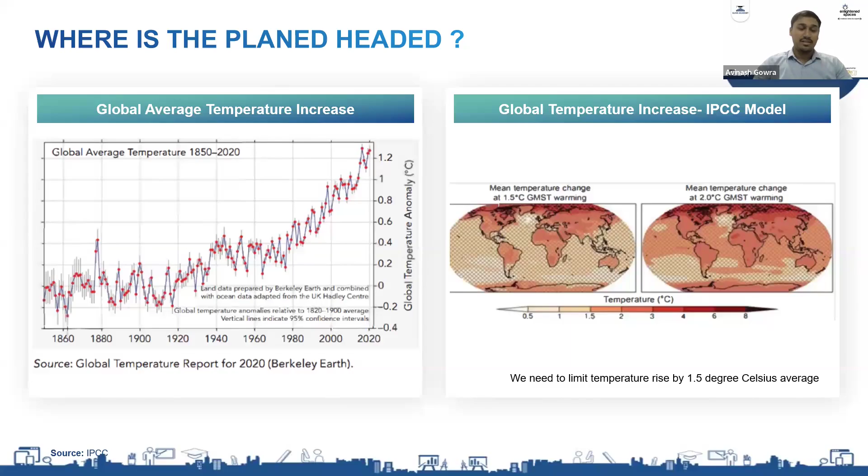And one of the main reasons attributed to these climate events is obviously the rise in global temperature. We have an agreement made in the Paris Climate Change Agreement, wherein all the leading countries have come forward and pledged to control the rise of temperature to not more than 2 degrees Celsius by 2100. If you look at the recent increase in surface temperature and the trend, we have already reached somewhere around 1.2 to 1.3 degrees Celsius. Looking at the rate at which the increase has been happening, we are nowhere close to meeting the target we have taken in the climate change agreement.

One of the key reasons for this increase in temperature is obviously the emission of greenhouse gases, specifically carbon dioxide. There are models which predict that if the current trend continues, there can even be an increase in temperature of up to 4 to 6 degrees Celsius by 2100, whereas what we are targeting is only up to 2. This calls for an immediate need for decarbonization of every activity that we are going to do, which is going to help the environment.

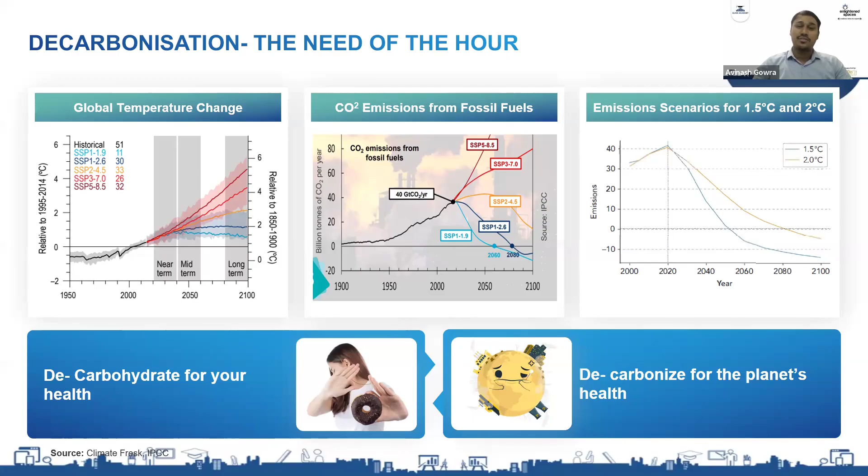In a very simple way, just like how we need to decarb or reduce carbs to take care of our health, it is also necessary for us to decarbonize for the planet's health.

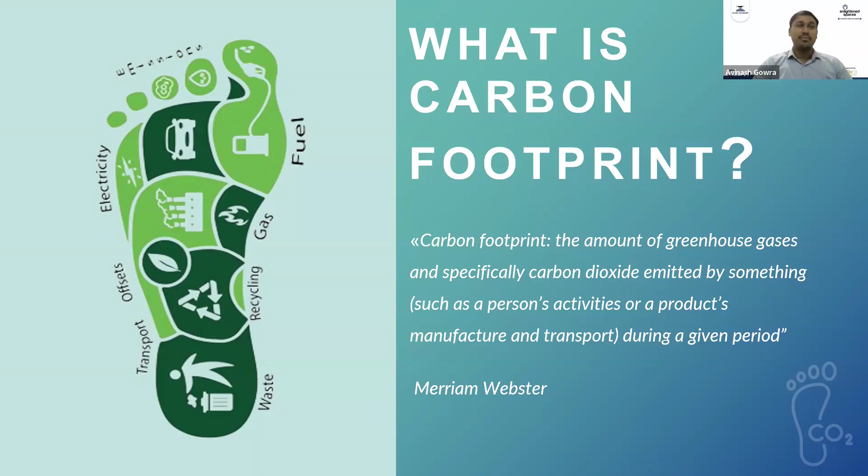So with this being said, let's try to understand what a carbon footprint is. Carbon footprint is basically the amount of greenhouse gases, specifically carbon dioxide, emitted by an activity. That activity can be production of a product, construction of a building, or transportation of goods from one point to another during any given period of time.

And why is it important for us in the building industry to be so much concerned about this?

If you look at the recent data, a survey says that out of overall greenhouse gas emissions happening, close to 39% of the global carbon emissions is coming from the building sector, which is an alarmingly high number.

An important fact to note is that 67% of India is still to be built. This means if we continue to build the same way, it is going to be highly unsustainable and not yield any good result for the environment.

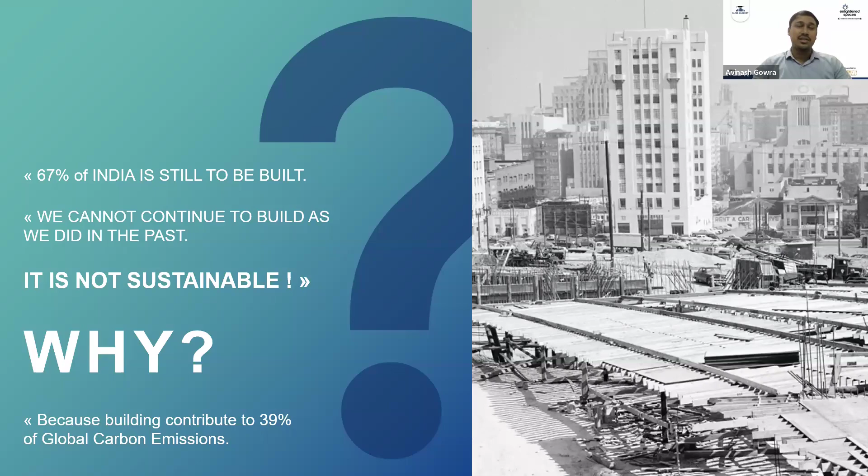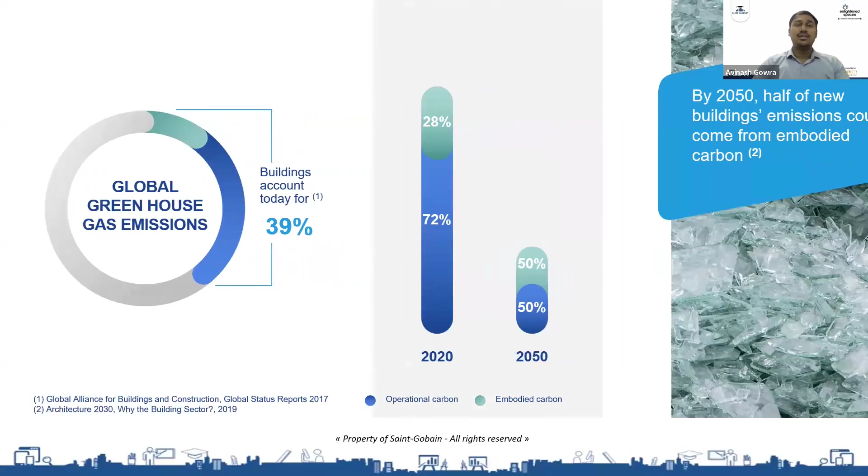With that established on why it is important to decarbonize, let's understand the two different types of carbon emissions. Of the 39% emissions contributed by the building sector, a recent survey says 72% is from operational carbon and 28% is from embodied carbon.

I'll explain operational and embodied carbon in the upcoming slides. With current practices, adoption of high performance materials, and current design practices, there has been significant work in reducing operational carbon. If this trend continues, the estimate says by 2050, of the overall carbon emissions, 50% will be from operational carbon and 50% will be from embodied carbon.

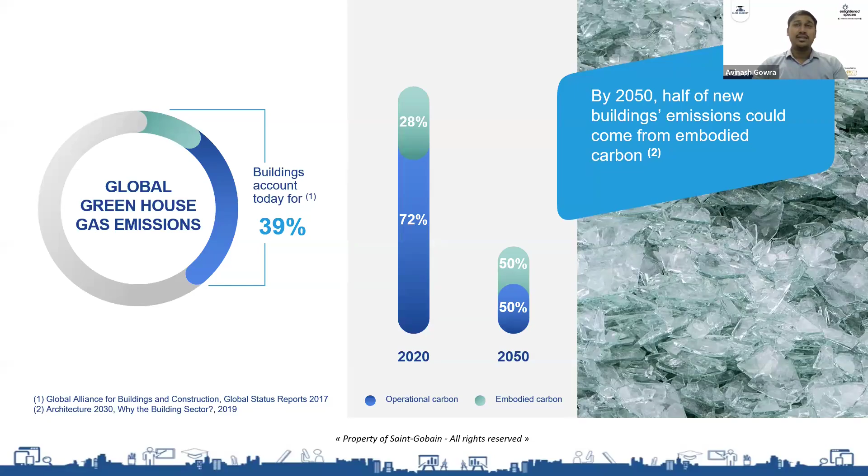This makes it very clear that it is important to reduce and work on both operational and embodied carbon. So what is operational carbon? Operational carbon refers to the carbon emissions produced during the operation and use of a building or infrastructure over its lifetime. For example, it can be carbon emissions happening because of air conditioning running during the day.

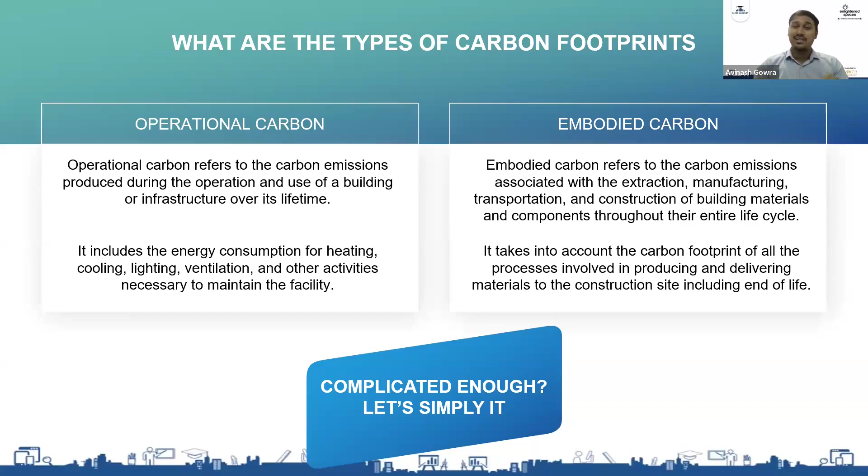It can be because of the water heater, or because of the lift being operated during the use of the building. In a simpler way, it includes energy consumption for heating, cooling, lighting, ventilation, and any other activity necessary to maintain the facility. All this is under the operational carbon of the building.

And what is embodied carbon? Embodied carbon refers to the carbon emissions associated with the extraction, manufacturing, transportation, and construction of building materials and components throughout their life cycle. This is right from the extraction of raw material to its installation and also its end of life, which is demolition and being dumped at the waste yard. All this contributes to the embodied carbon of the product or even of the building.

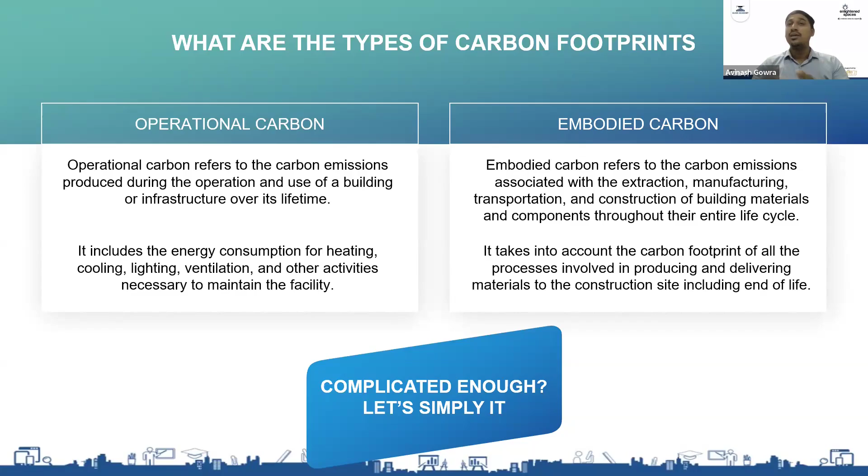If you still feel it's complicated, let me simplify it further. Embodied carbon is like a down payment on your loan, which is fixed. Once it's given, you can't change the down payment. Likewise, once you have constructed the building, the embodied carbon is fixed and you can't modify or change the embodied carbon of the building.

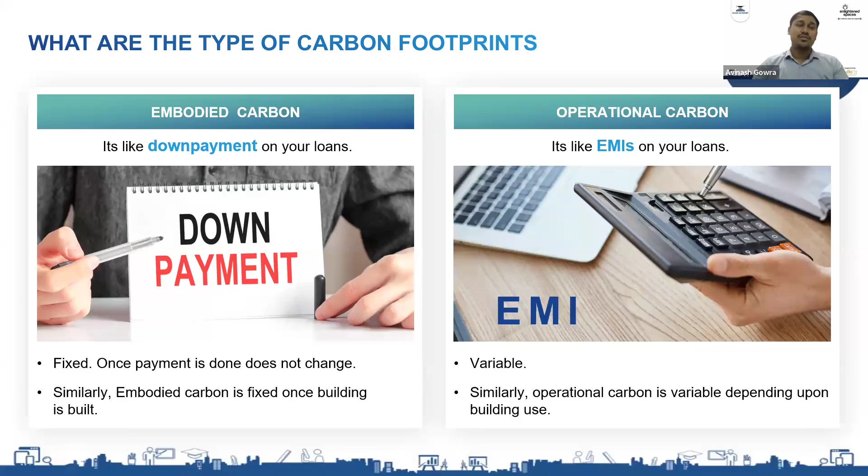Whereas operational carbon is like the EMI, which is variable. If I apply it to the operation of a building, it's like air conditioning. During summers you might have more emissions because of higher AC usage, whereas in winter there might be lesser consumption of air conditioning, hence lesser emissions. So this is a very straightforward example.

Now that we have seen why it is important to decarbonize, and understood the difference between embodied and operational carbon and how it exists in a building, let's try to link it and understand how these two play a role in making a building net zero carbon.

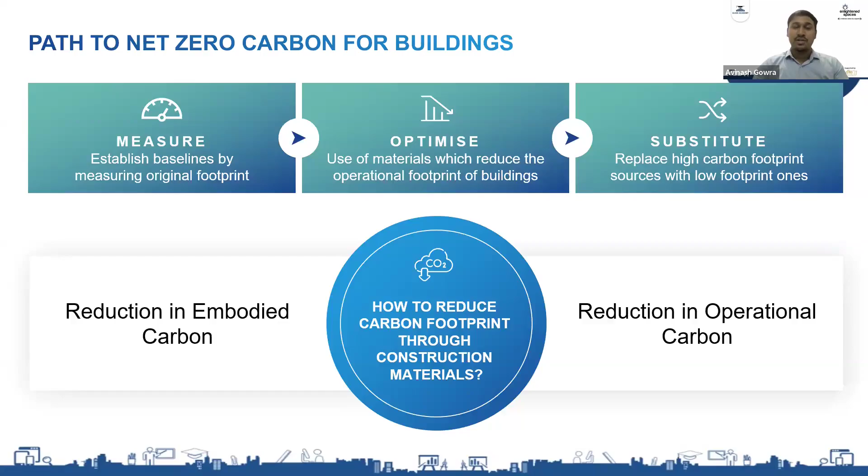I have proposed a simple framework: measure, optimize, and substitute. As we say, what can't be measured can't be reduced. Likewise, to even think about reducing or controlling the emissions of a product or a building, the first thing we have to do is measure how much we are emitting and what the carbon emissions of that building are.

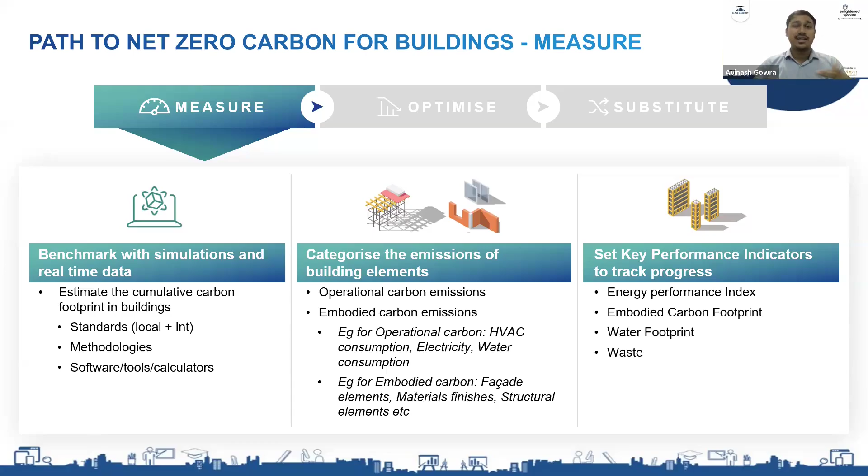There are multiple tools available with which we can estimate the emissions and benchmark them. Those emissions can be classified into different categories, like how much is from embodied and how much is from operational, and we can set key performance indicators so we can work towards reducing the emissions of those individual metrics and see how much we are able to reduce in the future. So this is with respect to measuring and setting the benchmark.

Next is optimizing. Once a building is up, we can try to optimize or even reduce the carbon emissions happening. Let's understand how glass can play a key role in optimizing operational carbon. If you look at a typical glass, there are three important performance parameters. First is solar factor.

Solar factor basically controls the amount of direct heat coming from outside of the building to the inside. The lower the solar factor, the more heat the glass will cut. We also have U value, which is the indirect heat that is coming from outside to inside. Again, like I mentioned for the solar factor, the lower the U value, the better the performance.

We also have another important performance parameter, which is light transmission, basically the amount of natural light the glass can allow from outside to inside. This is again in form of percentage. For example, a glass can have 50% light transmission, which means it will allow 50% of the outside light to the inside.

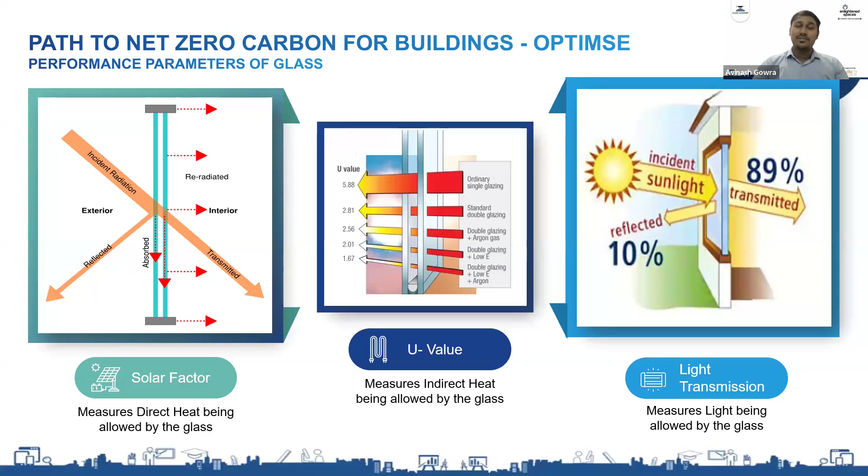With this explained, I'll try to explain a small case study on the impact of the right choice of glass on operational carbon. If you look at a comparison between a clear glass, your basic glass, which has a solar factor or SHGC, solar heat gain coefficient, of 0.76, a light transmission of 80 and U value of 2.8, we have tried to compare it with our high performance coatings, which will control the amount of light and heat that can come inside the building.

If you look at this comparison, you can see it is possible to reduce the cooling load, the amount of AC cooling load, by almost 35%, depending on the choice of glass we are using in our building. By choice, I mean by optimally selecting the glass which has a good solar factor, optimum light transmission, and a lower U value.

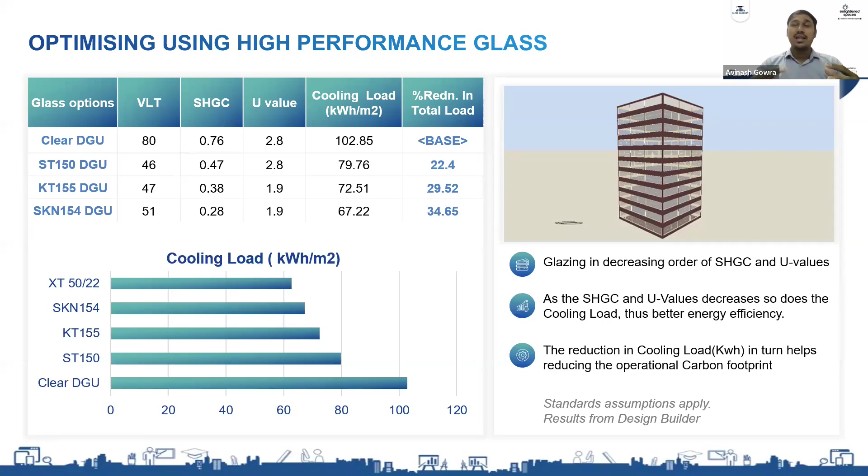So with this, glass can play a significant role in reducing the operational carbon of the building itself. Right now, there are other ways we can also reduce the operational carbon, which is by designing the building in such a way that we can have passive architecture like shading devices, which also reduces the direct heat coming inside the building, directly reducing the burden on the air conditioning.

Right, so now we have seen how, out of three steps in terms of measure and optimize, it is important to measure, and then we can optimize by choosing a glass with good performance parameters, and also with good design we'll be able to optimize the operational carbon. Next is substitute.

Substitute is basically using products which have lower embodied carbon emissions, like lighter materials, materials with higher recycled content and comparatively lower emissions, which are some examples for materials with lower embodied carbon emissions.

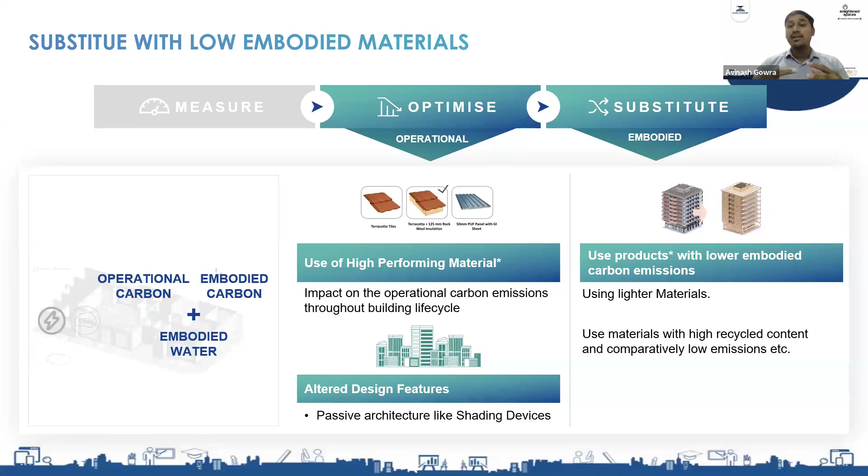So this gives us an understanding on how glass can play a role in reducing the operational carbon as well as the embodied carbon. So in order to reduce the embodied carbon of a building, we basically need to use materials which have lower embodied carbon. With this understanding, let's try to understand the current carbon footprint of facades.

If you look at a typical building, this is from research reports, we have understood that in a building, the facade, which includes glass as well as other materials like the system, the anchors and everything, contributes to 10 to 20% of the building's embodied carbon.

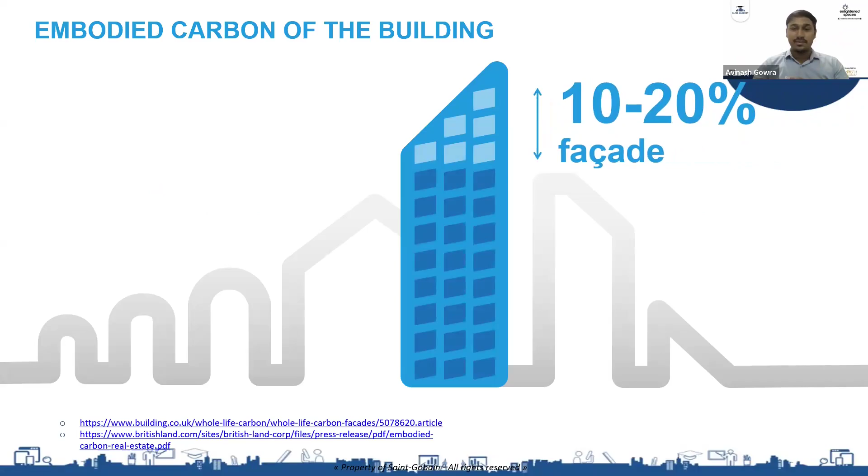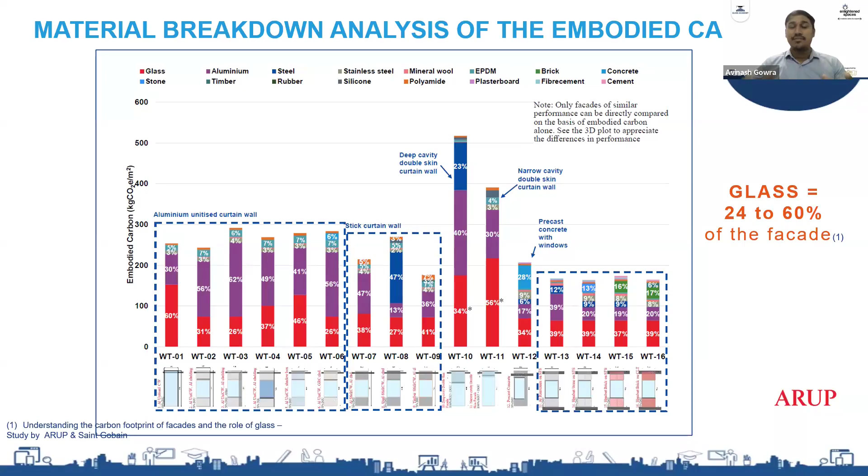And in that 10 to 20%, we had a combined study done between Saint Gobain and Arup, for 16 different types of glazing systems. What we understood is, out of that 10 to 20%, glass embodied carbon can vary somewhere between 4 to 12%, which is a significantly higher number.

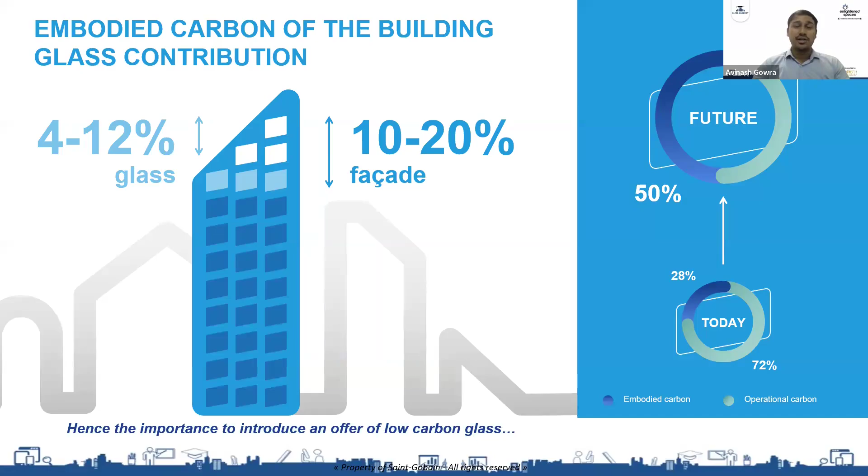This calls for the importance of introducing a low carbon glass, available as an option for builders so they can reduce the embodied carbon of the building by using a glass with lower embodied carbon. So this brings us to the important aspect of having a glass with lower embodied carbon.

With Saint Gobain's mission of strongly decreasing the carbon footprint while maintaining the same quality, performance, and aesthetics as our normal conventional clear glass, which is Planilux, and also available at industrial scale, we present to you Oraé India, India's first low carbon glass.

What is special in Oraé India is that it is made with a higher recycled content, 70% recycled content as raw material itself, and it is made with a low emission fuel, which is LNG, liquefied natural gas. There has also been substantial R&D effort and excellent industrial teams to ensure that Oraé India looks like a normal glass, is strong and aesthetically similar to a normal glass, with the same amount of strength as a normal glass.

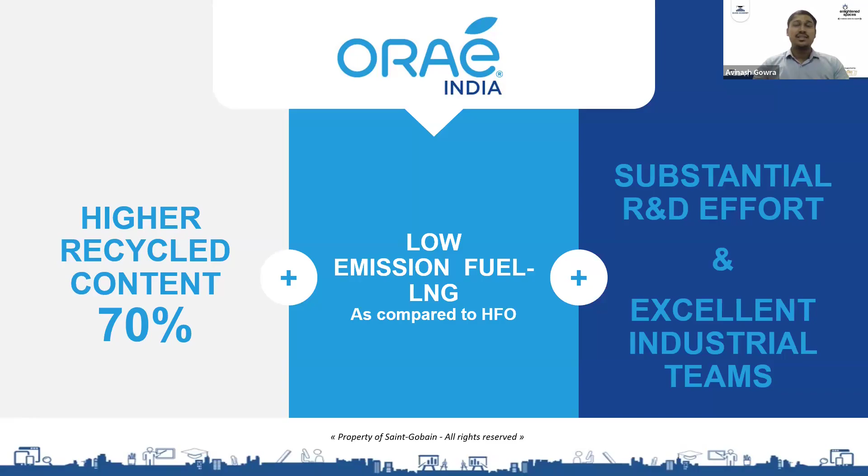The only difference is that to produce this glass, there have been lesser carbon emissions compared to normal glass. To summarize, Oraé India has 9.2 kilogram CO2 equivalent per square meter as embodied carbon, and this number is 54% lesser than the carbon footprint of a conventional clear glass.

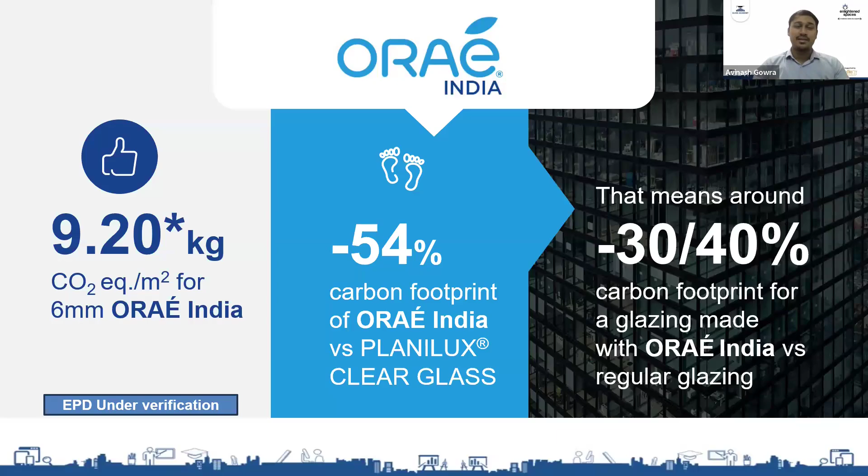54%, that's the number we have achieved with Oraé India, which means if Oraé India is used in place of conventional clear glass, the facade's embodied carbon can be reduced by 30 to 40%. The EPD for Oraé India is under verification and should be available to the public in another 3 to 4 weeks at max. This number will be mentioned in that EPD, which can also be accessed by the public for verifying if the number is correct.

With Oraé India, what you can achieve is reducing the embodied carbon of the facade as well as the building. It reduces the construction carbon footprint and also supports circular economy, because 70% of the raw material is actually recycled glass. It meets sustainability without compromising performance.

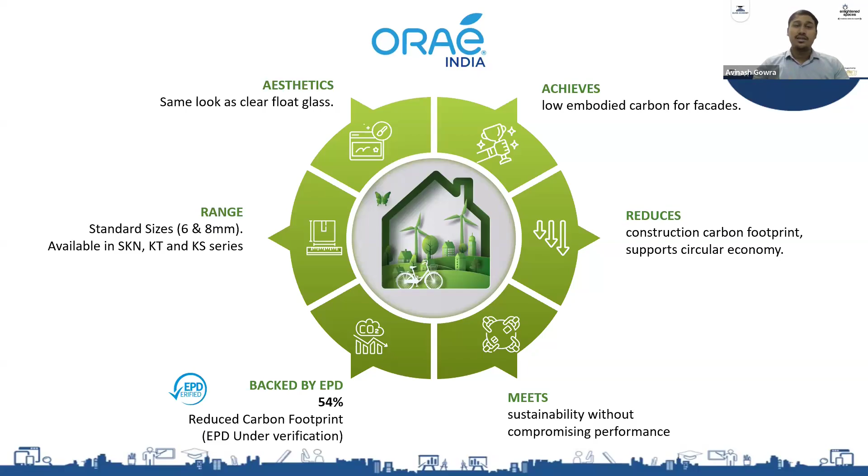We have an EPD coming up which validates that this has 54% lower carbon emissions than normal clear glass, and it is available in wide ranges. It can also be combined with our high performance selective coatings, which will further contribute to reducing the operational carbon of your building. And in terms of aesthetics, there is no difference - it looks the same as normal clear float glass, which is Planilux India.

This is a big step towards reaching the milestone of being a carbon neutral company by 2050. In fact, India has pledged to be net zero by 2070, and this move towards adopting low carbon materials is key to reaching that milestone.

Another important aspect is the sustainability goals set by the organization, wherein we want to become a carbon neutral company by 2050, and we are in line with the measures we are taking. In fact, our emission measures have been validated by SBTI, the Science Based Targets initiative, which validates the emission measures being taken by the organization.

With this, I would like to conclude and summarize: we saw why it is important to decarbonize, we understood the difference between embodied and operational carbon, and how a building can become net zero carbon by measuring and reducing operational carbon, and how glass can contribute to that. We also understood the embodied carbon of glass, and discussed Oraé and its benefits. Thank you, and I'm open for questions, Anvita.